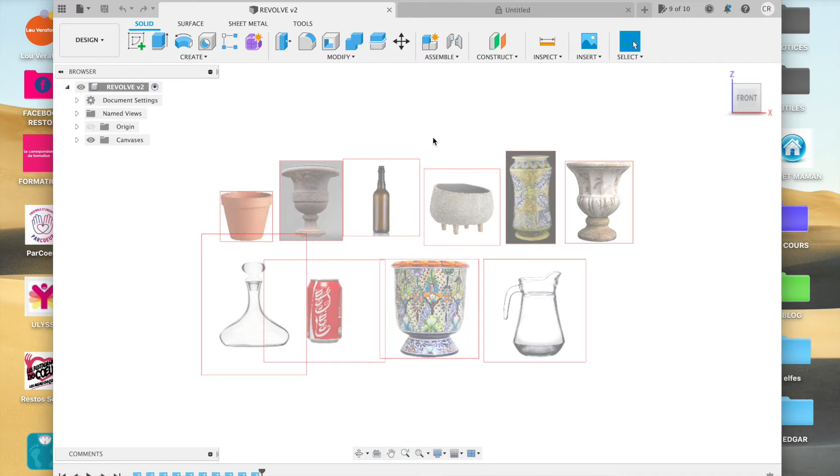Guys, as I promised, we are going to make some of these pots or bottles. But first I have to explain to you how to put these images into Fusion 360. So we are in a new file.

We are going to insert a canvas. So you have here the little canvas. Just click on the canvas and search in your computer where the image you want is.

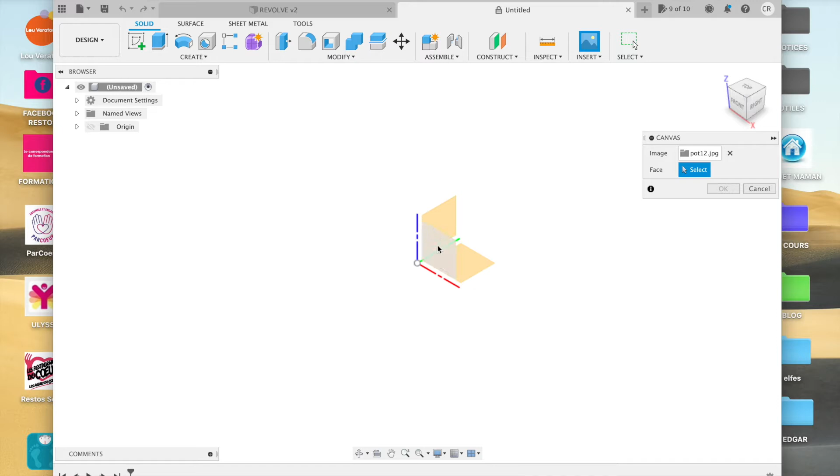Bottles, pots. Okay, I'm going to choose this one. Open. Okay, and I have to click on the plane I want to put the pot on, and that's it. I resize it a bit, click OK, click on front to see it really well.

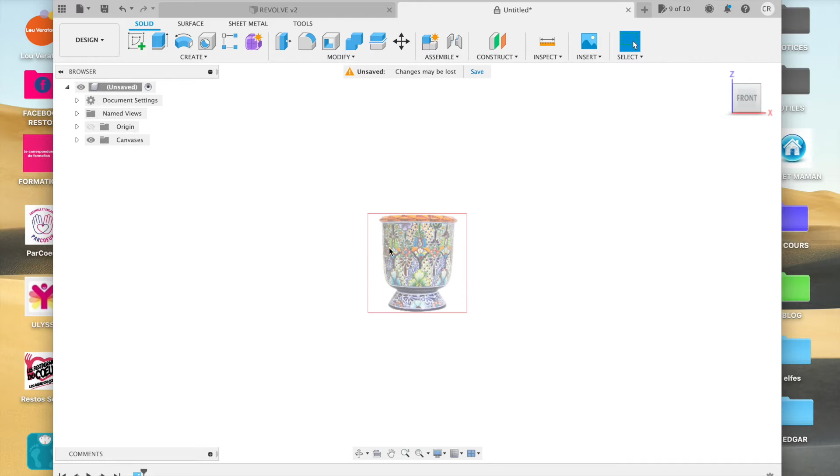Now I'm going to think. I must take the time to think about the shape of the object I have. Is it possible to use the Revolve tool to make this pot? To use the Revolve thing, I have to make an axis and then a shape, and then turn it around the axis. You remember? I think it can be possible.

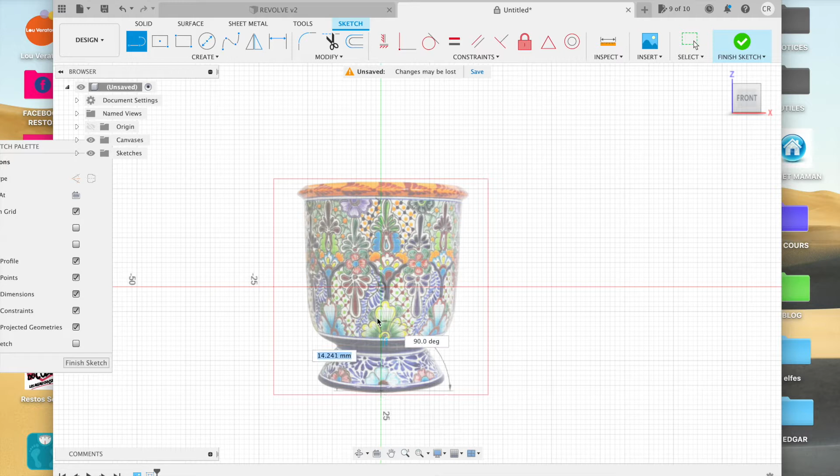I go a little closer. So I take the same plane as the pot in vertical. I'm going to draw the axis. It's about the axis, it's not rocket science, you know.

Now I'm just going to trace this shape. First, remember, I always have to make a horizontal line and stop, and then I'm going to take this spline tool that we discovered last week, and I click here and click here and click here and stop. I prefer to stop now, because if I go on, there will be some round thing I don't want.

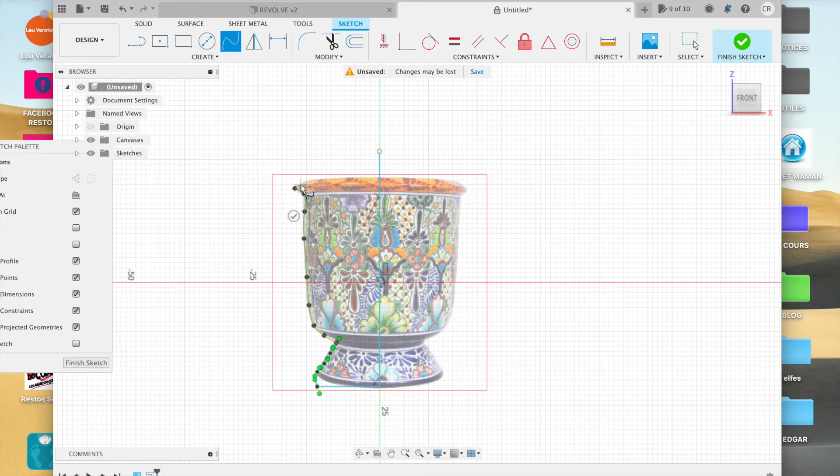And now I do it again. I begin on the last point and do it again. I click and click and click and click, a little something, and stop. You know that to stop, I can click on the little tick that was here, or I can double click. It's exactly the same.

And to finish, I make a horizontal line. So now I'm going to turn off the canvas. I don't want to have the canvas anymore, just to see if my sketch is closed.

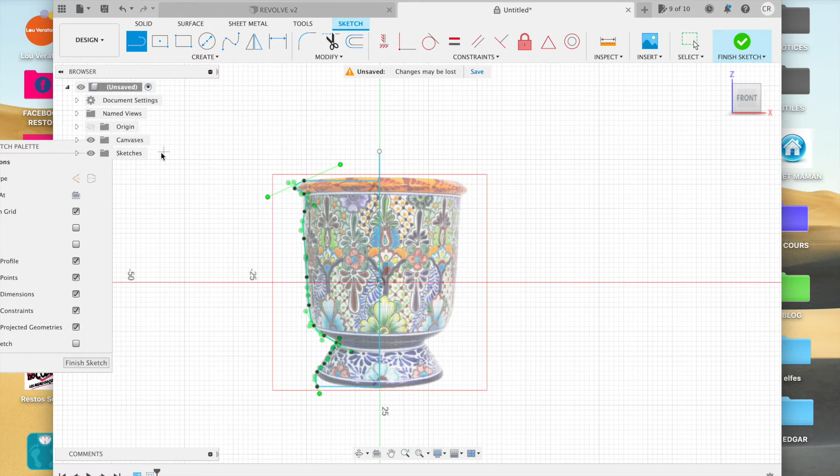So I just, there is an eye. If I click on the eye it's closed, so I don't see the canvas anymore. I just wanted to be sure that my profile was closed. It is closed, as you see. It's in blue, in light blue.

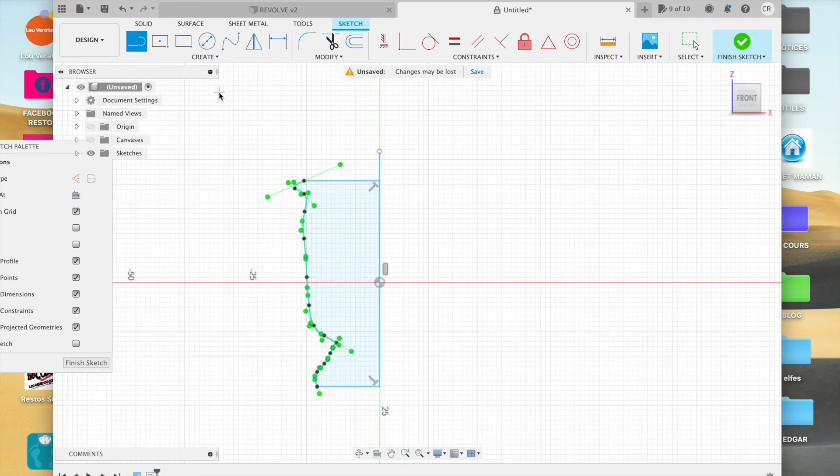So now I can finish my sketch, and I can choose the Revolve tool, choose the profile, it's already selected, and then choose the axis. And that's it. We have the pot—it's not exactly, but it's quite the same as the pot we traced on.

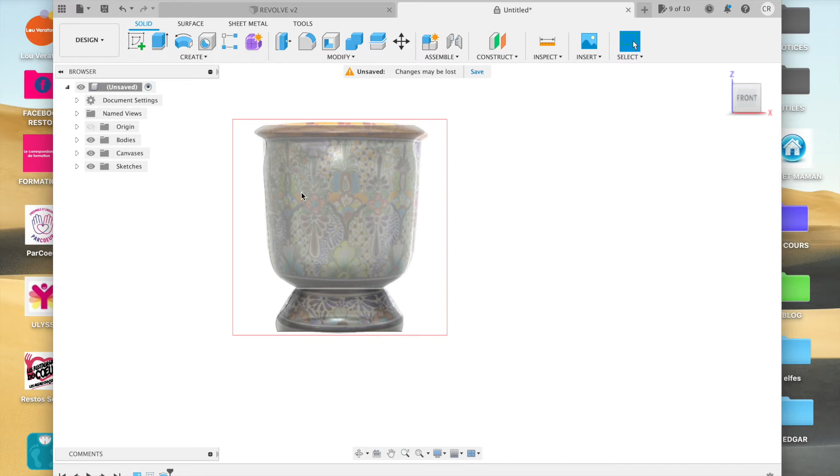Now we're going to make some of these. I put some traps in this photograph because we always have to think about what is possible and what is not possible with this Revolve tool.

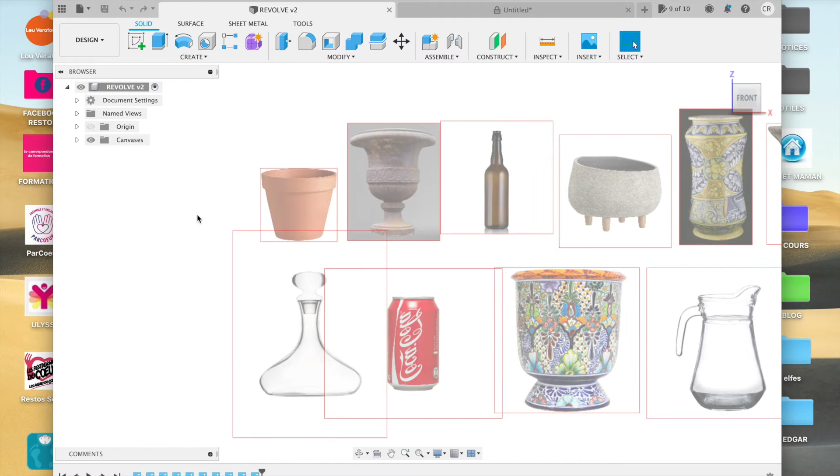So we are going to begin with the first one, which is a very ordinary pot. Always begin by choosing the plane, vertical one, always beginning by the axis in the middle of the pot. I can tick on it or I can double click, it's the same to stop my line. Always make a horizontal bottom, so double click, and then, well, it's quite simple because I don't even have to use the spline. I just have to do this and this and this and this.

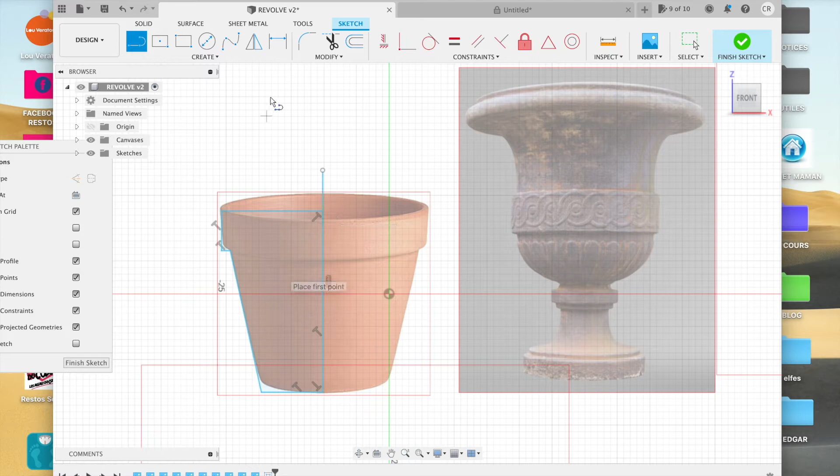Okay, and now finish sketch, revolve, I choose the axis, and voila, I have my pot. I will not make the holes in them because you know how to do that.

So this pot is okay. This one seems quite complicated. Of course we won't be able to make all this stuff, but we can make the shape, the rough shape.

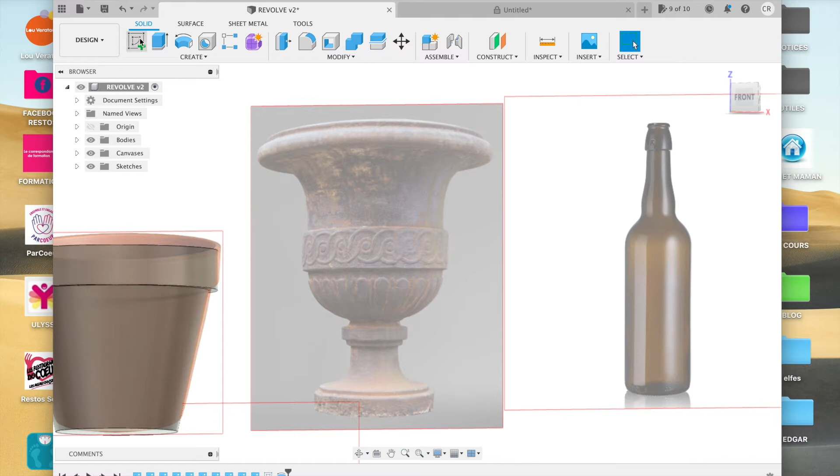So, create sketch, choose a vertical plane, okay, and then what else? The line, the axis in the middle of our pot, okay, and then horizontal bottom and go up a little thing like that, a little thing like that.

Now I have to use the spline tool to make this part, so I take the spline tool, I begin on the last point and click and click and click and click and stop.

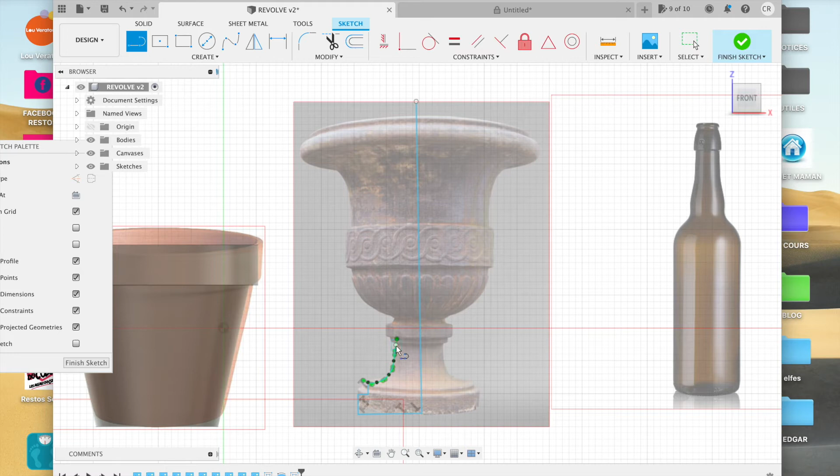Now I take the line to go on this. I'm going to go a little closer, more easy to see. So this and this and this and this and this and this, or perhaps a spline. Yes, I'm going to take a spline, just to make this little thing here.

Okay, I stop the spline and I make a new one. Tuck, tuck, tuck, tuck.

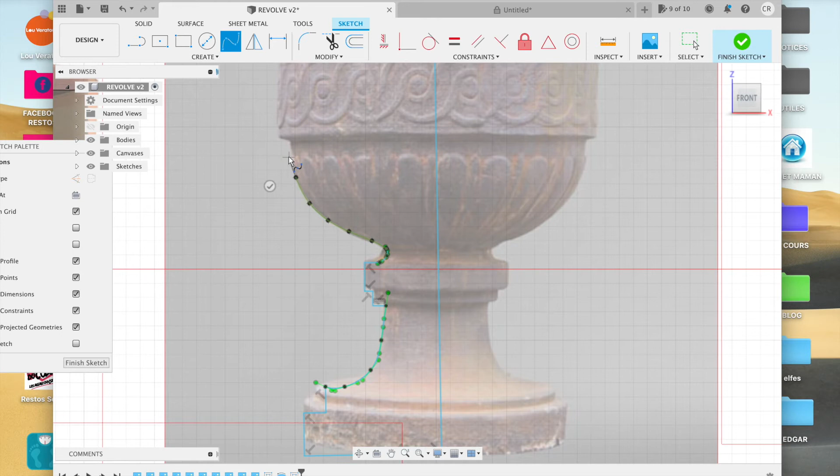Okay, now I take a line to make something straight, and then up and horizontal, and well, here I need a spline, so stop.

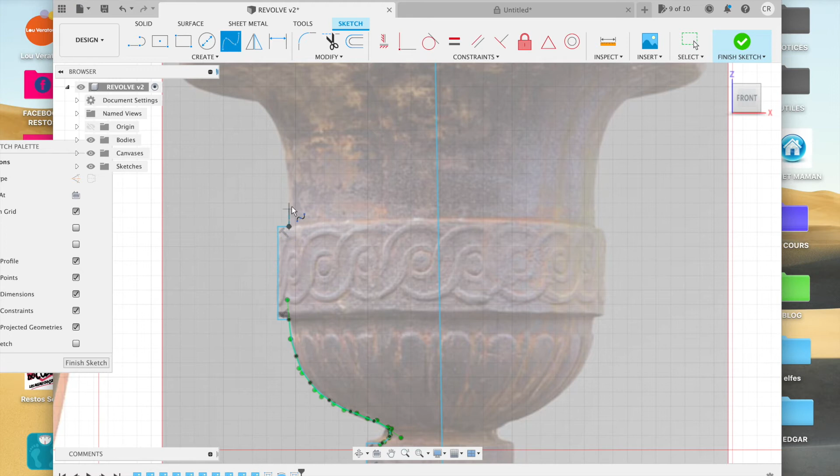I take my spline and click, click, click, click, click, click, click, click, click, click, stop.

I should have went on. So I go back and click and stop, and then I put a horizontal thing.

Because of course the image is quite different, but we always have to make a horizontal thing. I close the eye of the canvas just to see if this is okay, and then I finish my sketch.

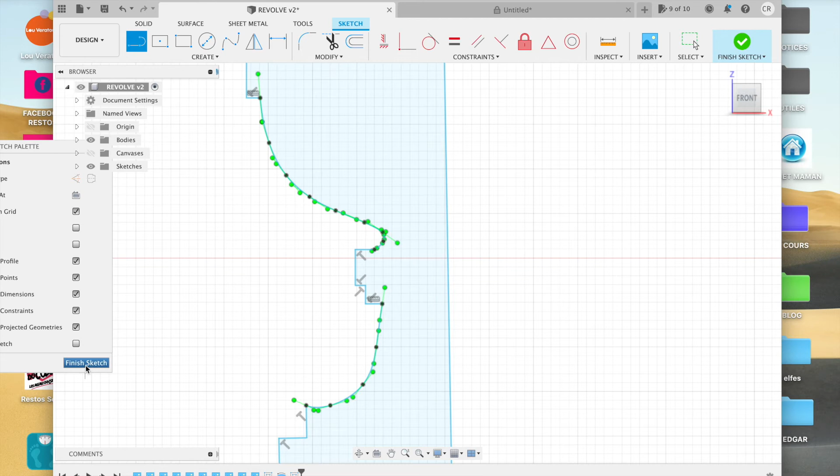I take the revolve surface, the revolve tool, the profile is selected, I take the axis and up. I have a wonderful Italian vase. Did you see how easy it is?

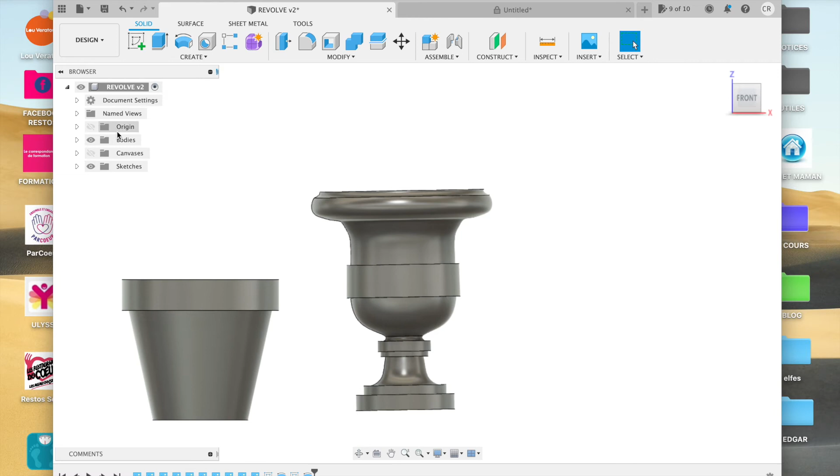I take my canvas back, and now a beer bottle. Am I? Is it possible to make this bottle? Yes, because I have a very straight axis and everything is okay. So I'm going to do the same.

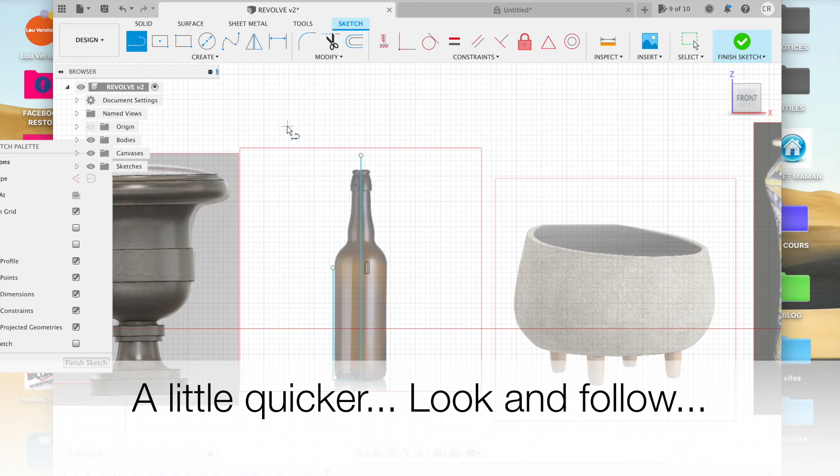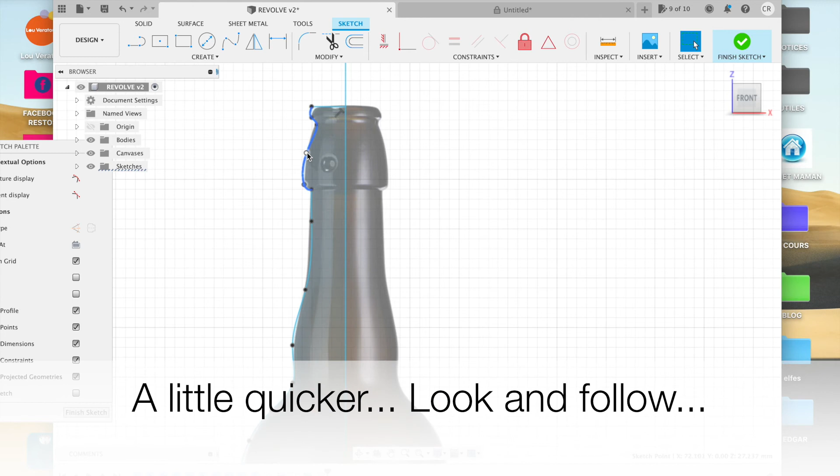I'm not going to speak because I let you see what I'm going to do. I close the eye of the canvas and we have our beer bottle all made.

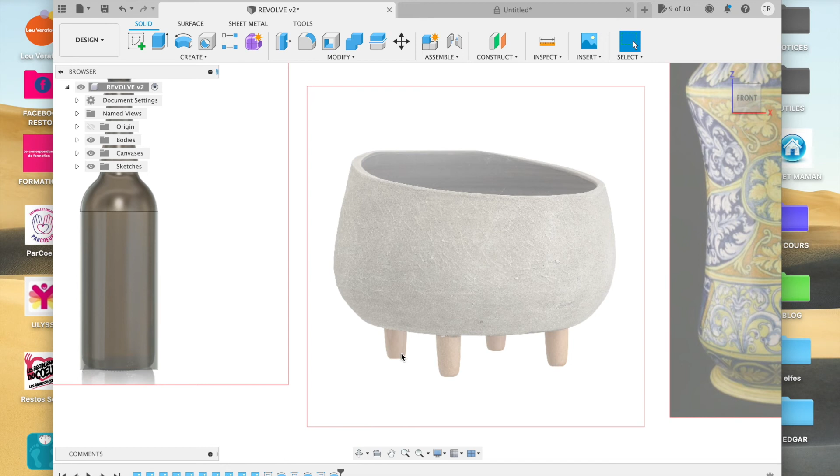I take the canvas. So, will I be able to make this one? Think about it and tell me. Well, I can't hear you, but I imagine that you say no, it's not possible, because this side is different from this one and we have the 4 little legs, so we can't do it. We could do it, but it would be very difficult and it's not the time.

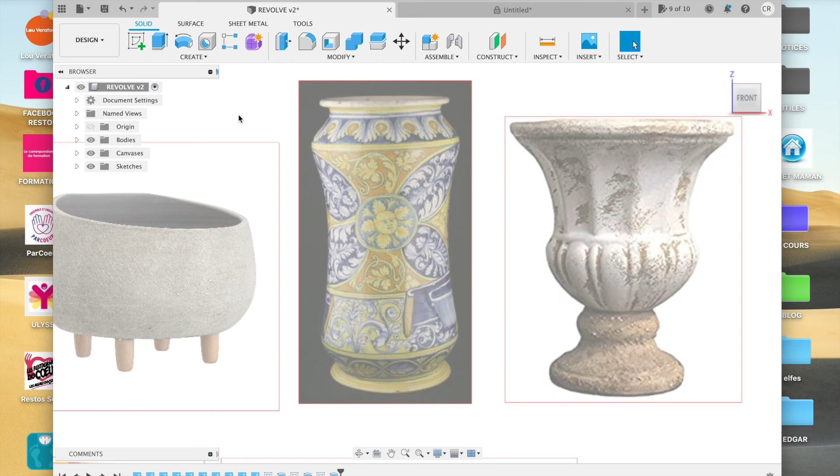So this one, it's a very old apothecary pot, so this one it's okay. I'm not going to speak anymore for this one, I'm not going to say anything.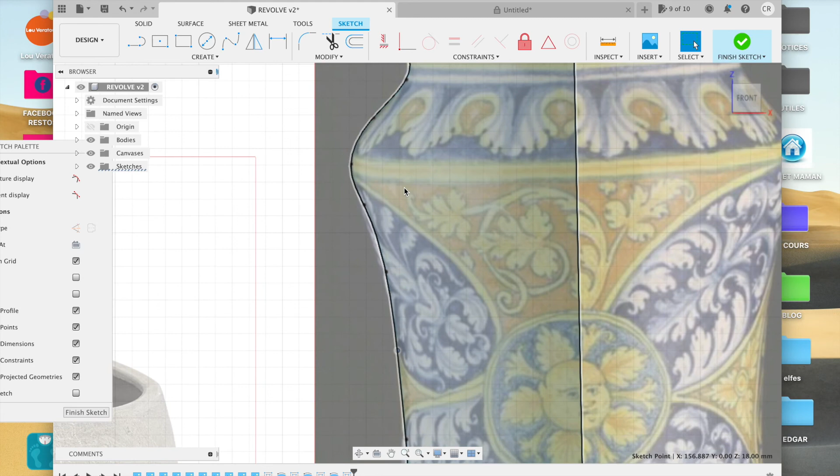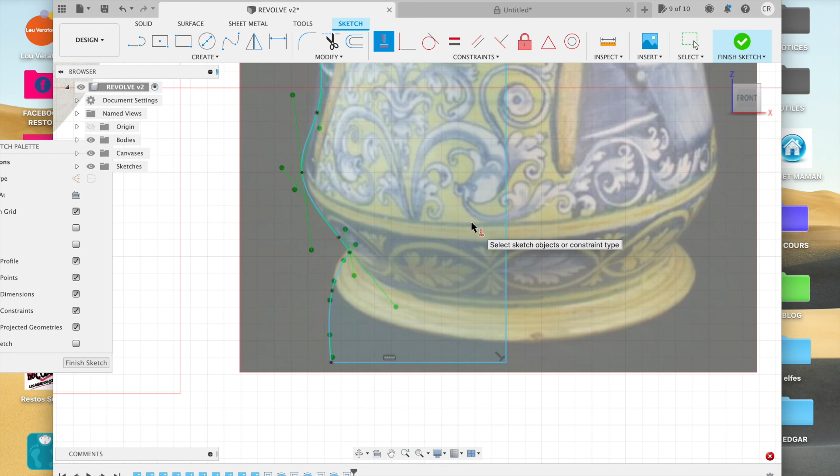Okay, you see I'm just dragging the points to fit the image. Seems nice. Is it horizontal, this one? I'm not sure it's horizontal. If I want it to be horizontal, there is here a tool. If I click on this tool and then click on the line, it will put it horizontal if it isn't. Okay, so now finish sketch.

And here is the pot. Okay, easy, yeah?

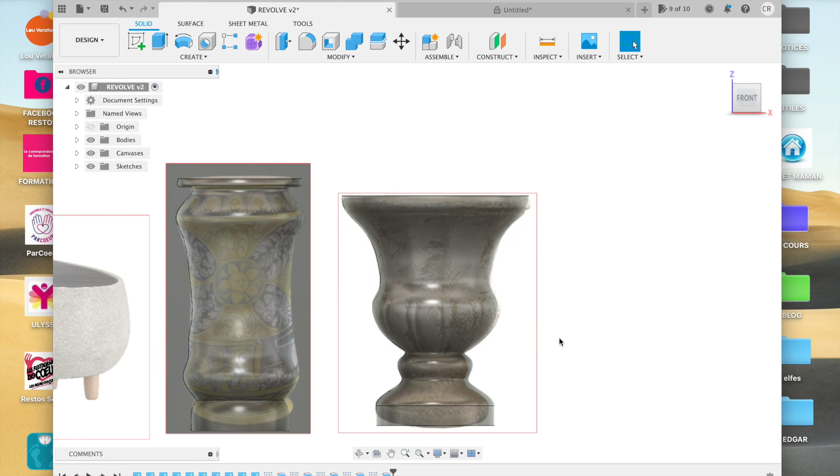A new Italian vase for your garden.